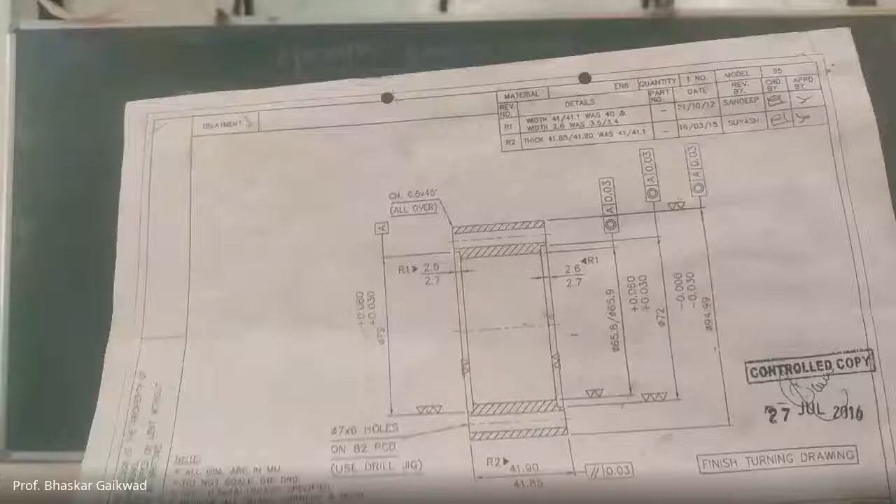The drawing from the industry to manufacture a job. Okay. So we have the drawing and we have the finished job. So this is the finished job. It is visible to all of you, I think. And this is the drawing related to this job. Okay. Now we have to make the process sheet for the same process of manufacturing.

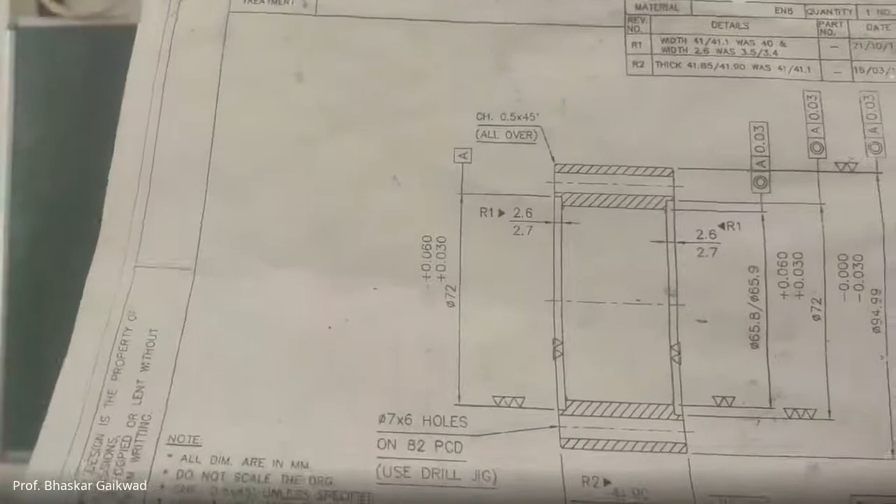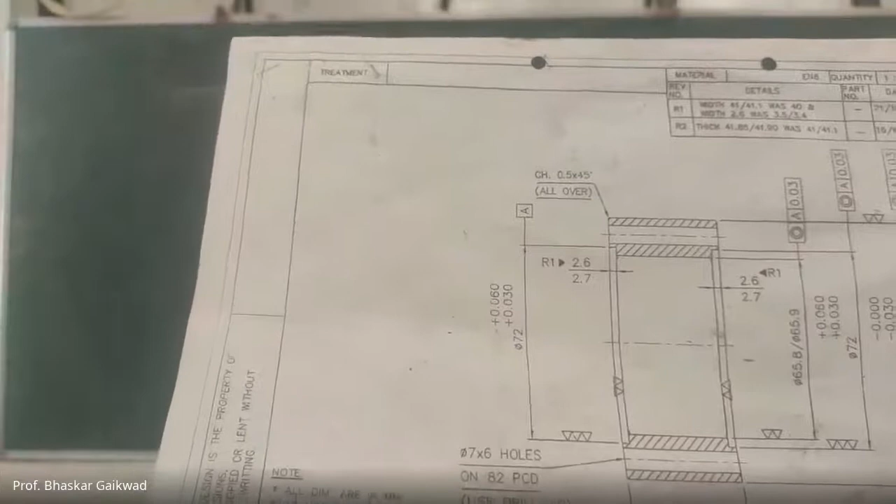So the name of this component is gear blank, which is normally used in our planetary gearbox. And here we are manufacturing the same. So as per the drawing, we have received the material from the industry. So it should be in bar form. A 100 bar is there, and its width is 42, and the bore size is 65, and there is a step on both sides. Six holes are there with PCD 82.

I think you might have seen this type of job in our workshop. And presently, the same lot is being manufactured here itself. So in industry also similar types of jobs are there. So we have to make the process sheet or the process charts. In our industrial engineering, it is called the operation process chart. There are two names of operation process charts: outline process chart and bird's eye view.

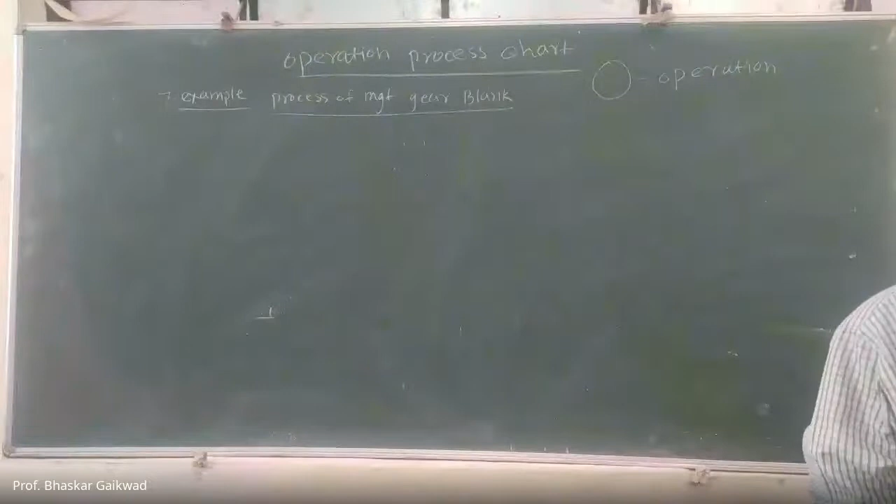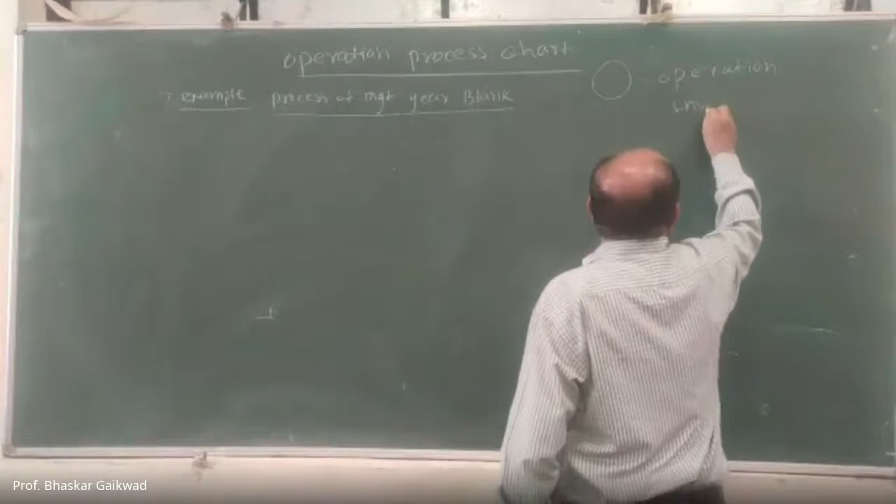Two symbols. One circle is there, so this symbol is the operation. So this is the operation symbol. And the next symbol, that is the inspection symbol. So in this process chart, we can use two types of symbols. So here only operations we have to note down, and the related times required, and the symbols. So we make the chart of the same. So see on the blackboard how I will make the chart.

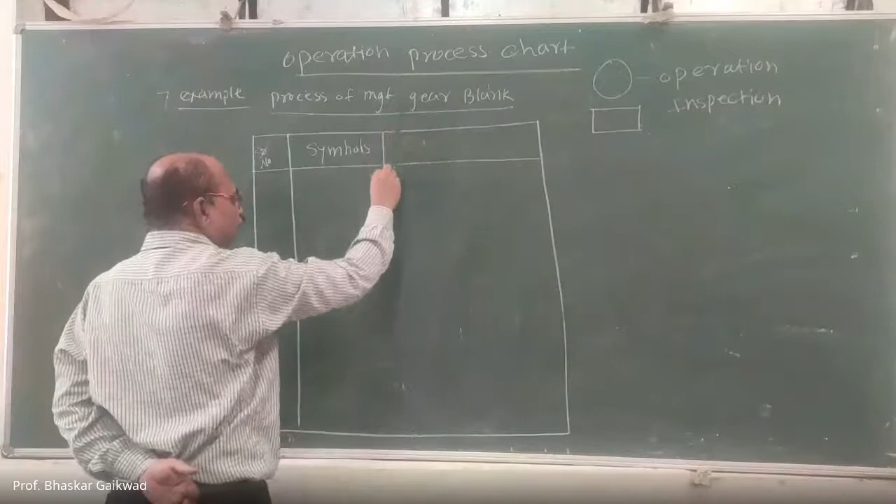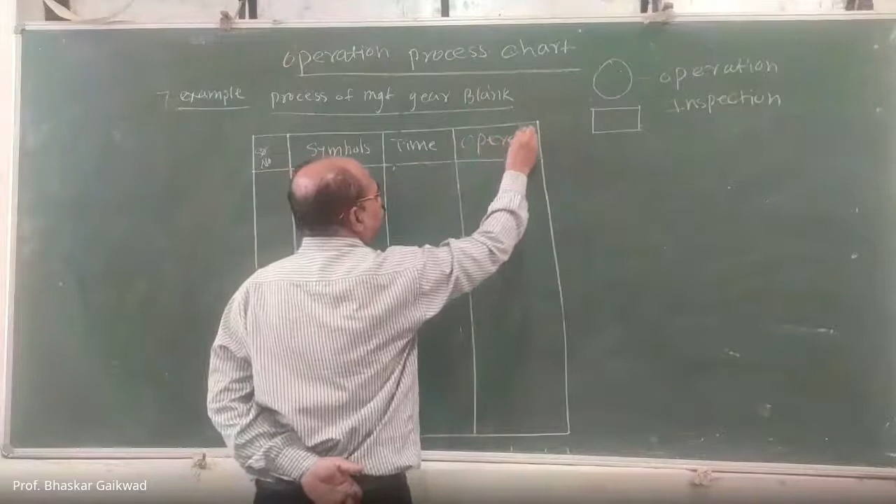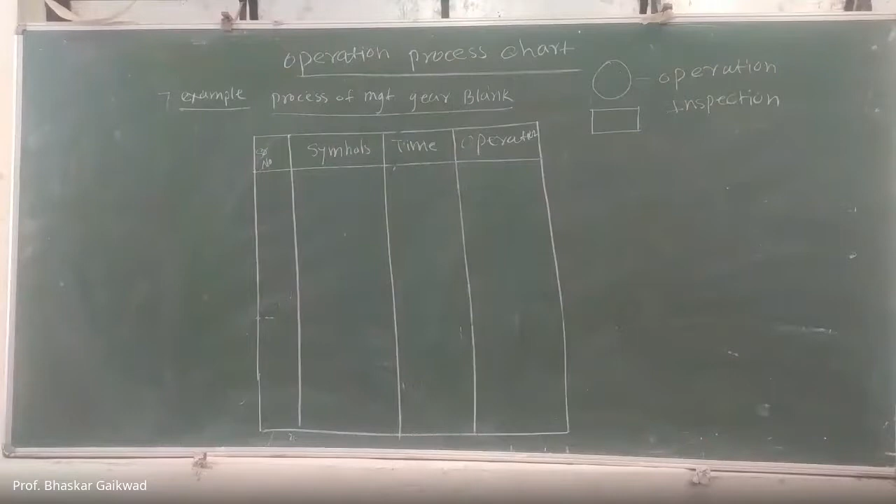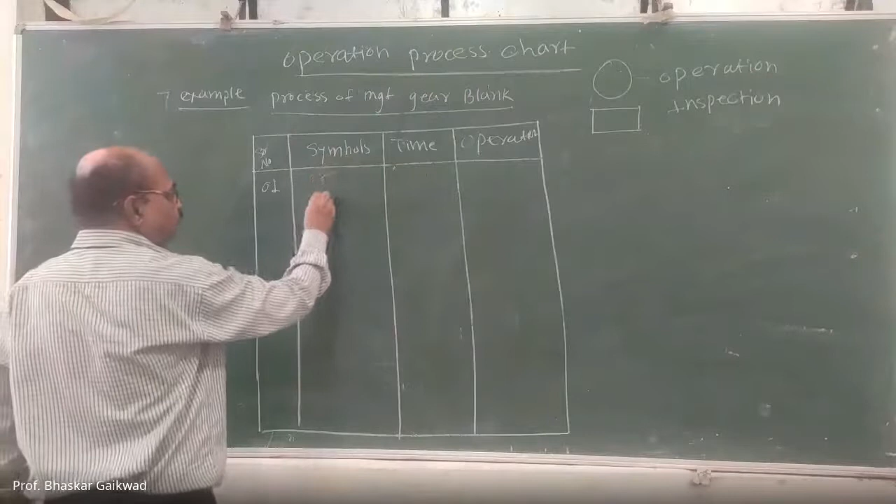So this is the outline process chart, or bird's eye view. So the first operation, once we get the bar from the rolling mills, initially the operation is cutting, to cut the bar into the required size. For example, you can see the drawing. The width of the job is 41.85. So let us cut the job to width. So the first operation is cutting. So cutting is the operation, and how much time is required for this. So this is the first operation.

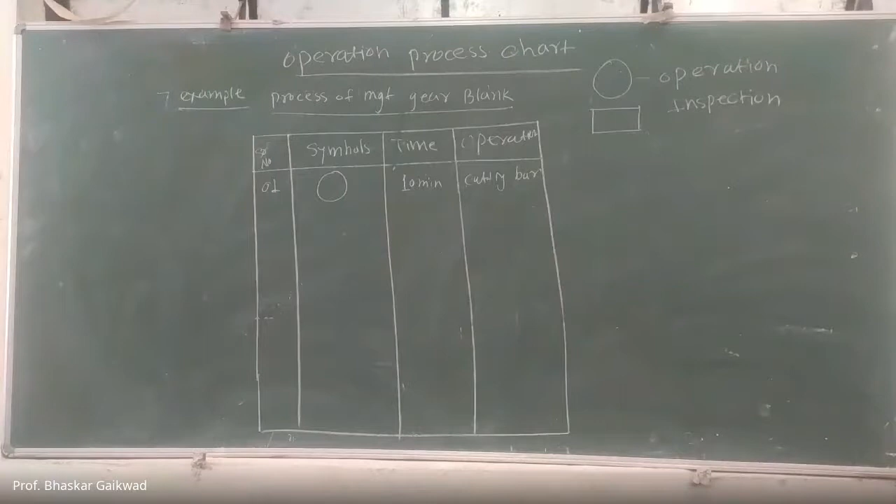After cutting this, what will we do? We'll go to the next operation. What is the next operation? First of all, you will go for the drilling of this hole. So the hole diameter is 65.8. So initially we have to go for drilling and after this boring. So this is one operation.

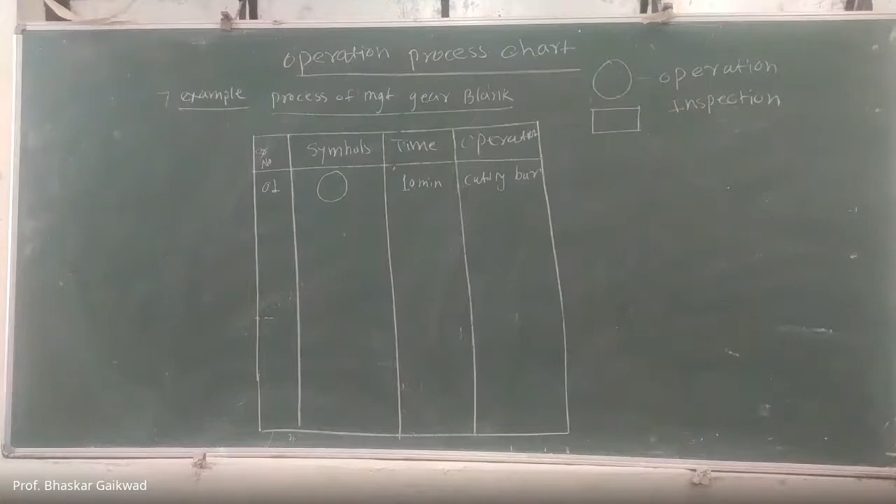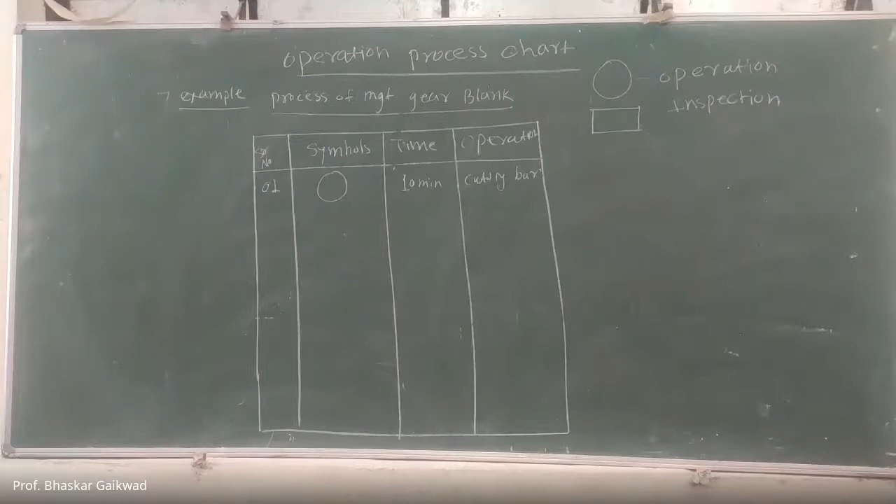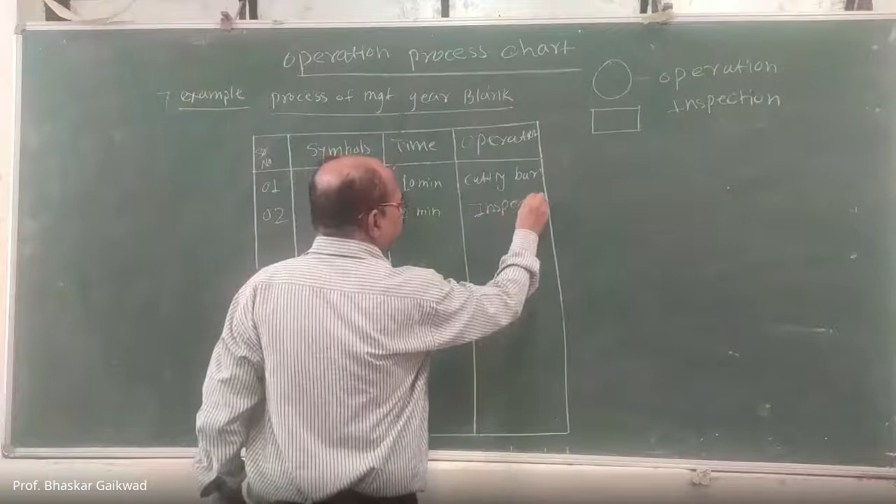Okay. But before that, after cutting, the size of the job we have to check. What is our expected size? 45. So the 45 size you have to check with verniers. This is called inspection. So the next thing is inspection. So here number two, inspection. How much inspection time do we require? At least 2 minutes. And here the operation is inspection. Once the cutting operation is over, then we have to go for drilling. So the next operation is drilling.

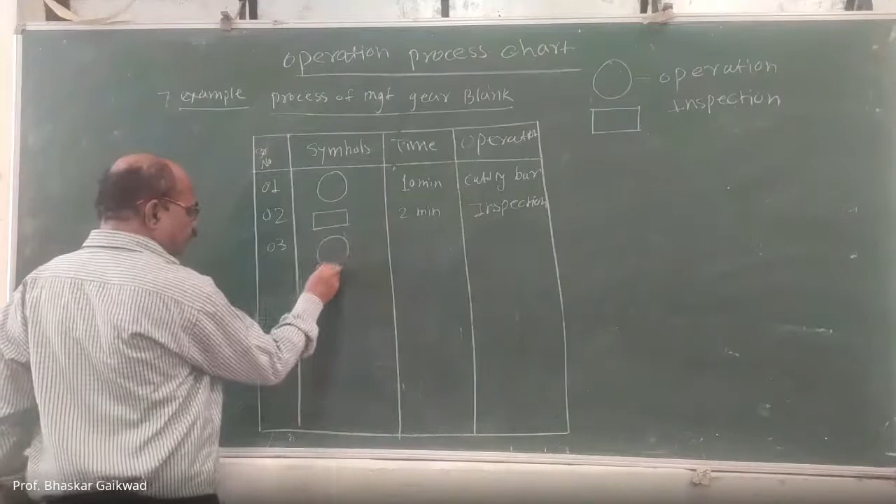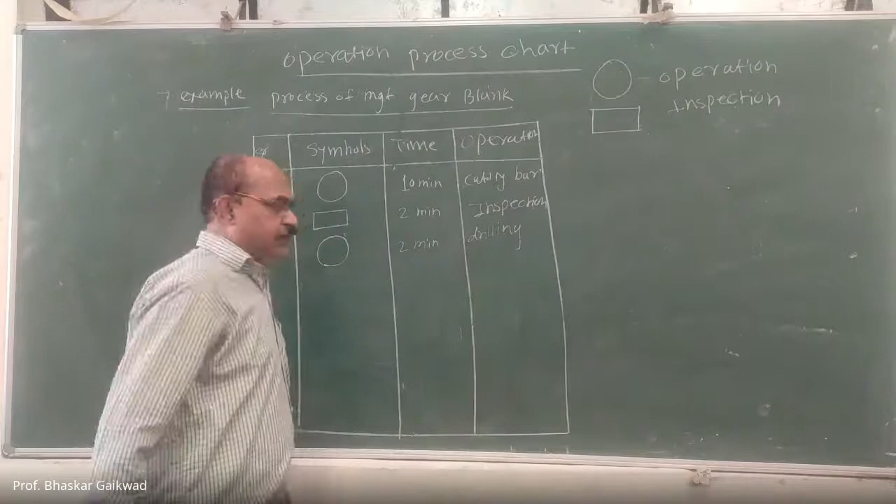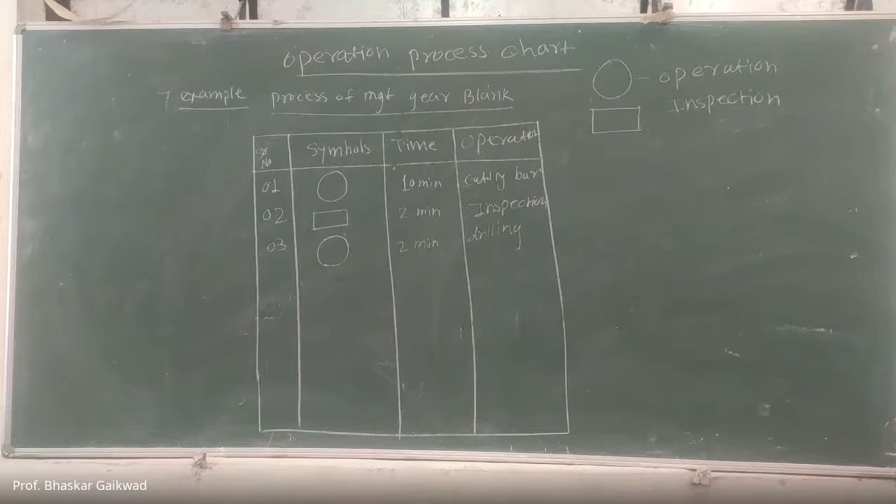Only two symbols you have to use. One is inspection and second is operation. Once the drilling is over, then we have to go for inspection, if you require, but after drilling it is not necessary to go for inspection.

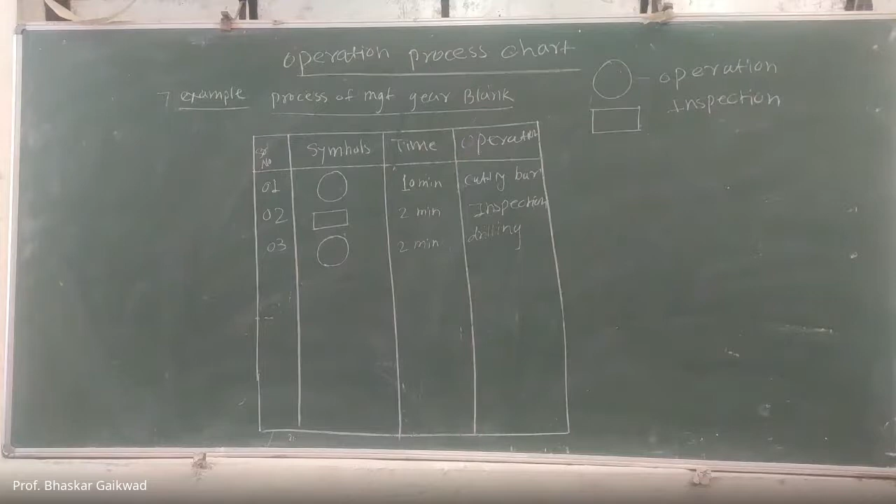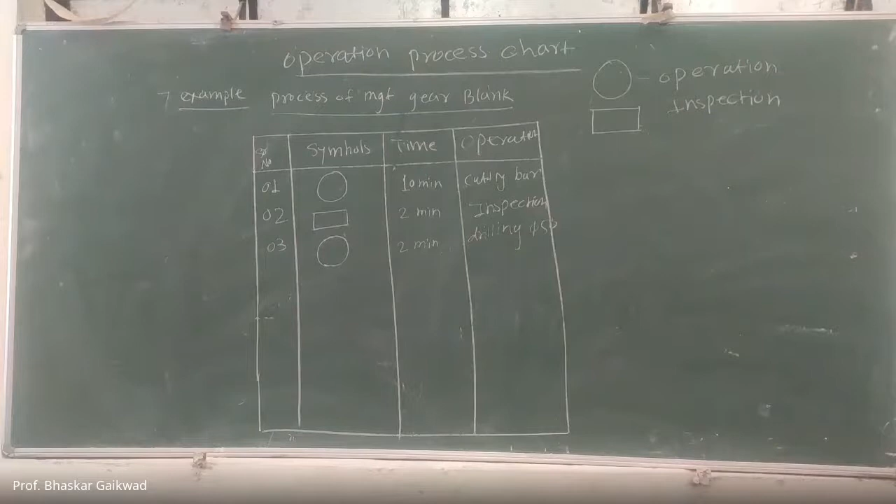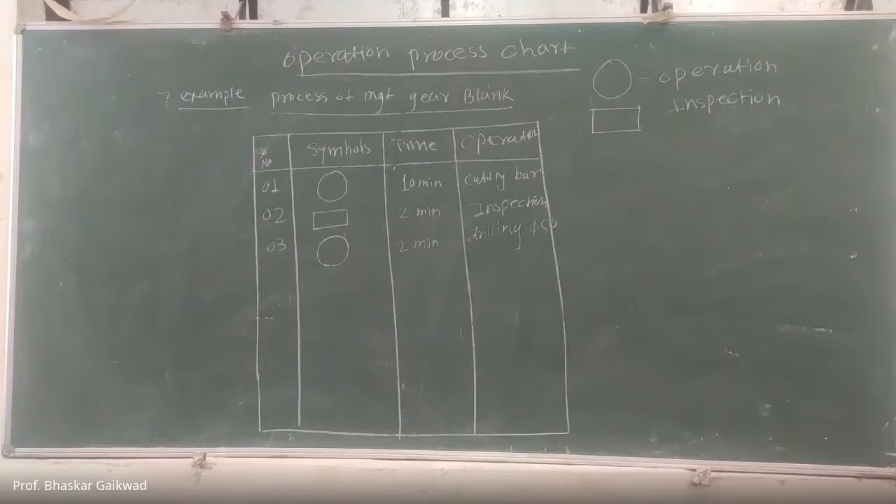Directly you can go for boring, because the bore size is 65, so at least 50 diameter you have to drill. So here the diameter of the drill is 50 mm. A 50 mm operation is there. So this is the next symbol, meaning we have to go for drilling. Okay, so like this, holes we have to go for drilling, and after drilling, we have to go for boring. So the next operation is boring.

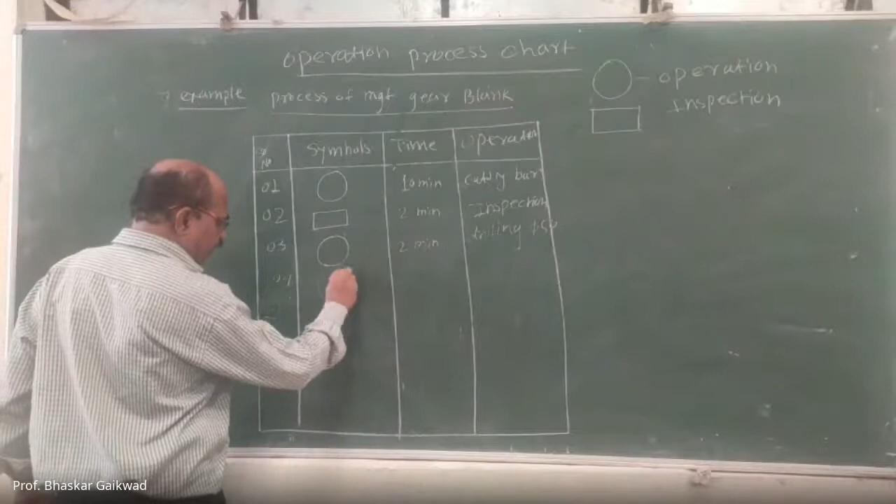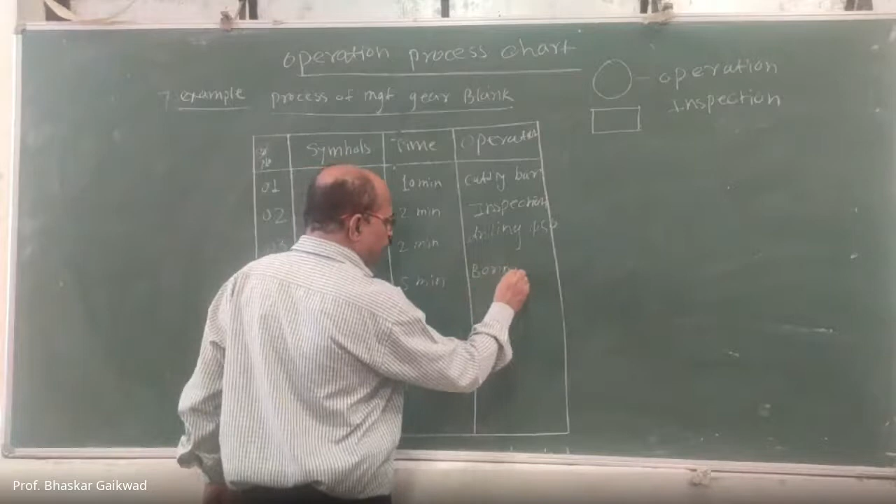Inspection is not required. So boring, on which machine? We have to go for CNC machines. So here number four. Once again an operation is done. So for this operation, let us consider 5 minutes, and the boring operation is done. So at the same time you can go for the boring, step turning, and facing operations. Within the same setup, you can go for boring and step turning.

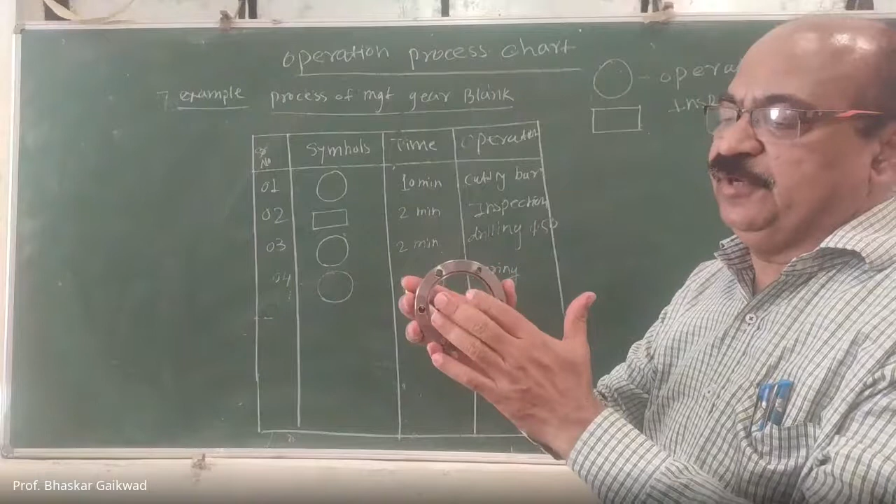Step turning means what? Whatever step is there. See this. This is the step. So you can see that this step is there. So you can go for the facing operation, the boring operation, and this step. So here, the facing operation is there, and the step turning.

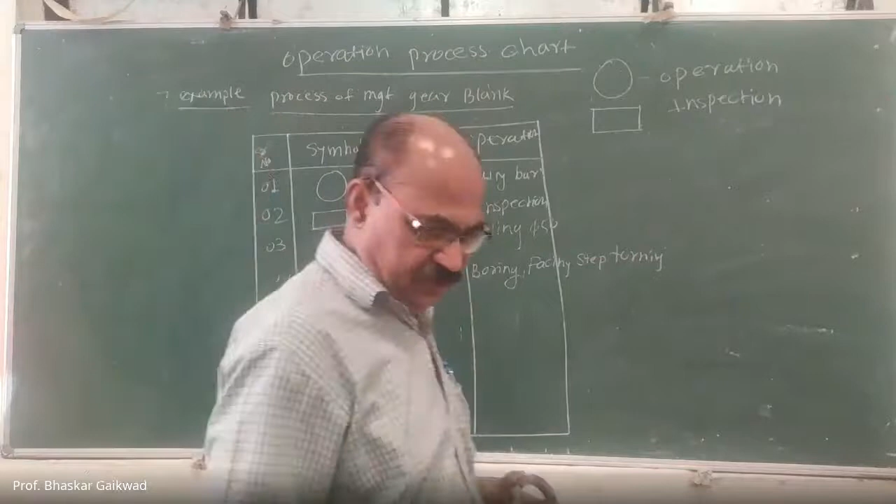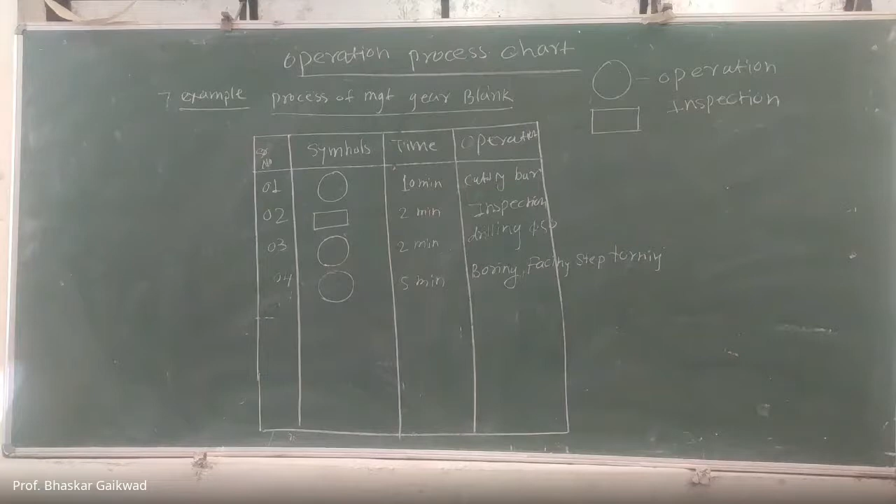So here, facing operation, and here step turning and this boring operation. So three operations at a time we can do with the help of our CNC machines. So this is the next operation. After this, we have to remove these jobs and get them checked. The next thing is inspection.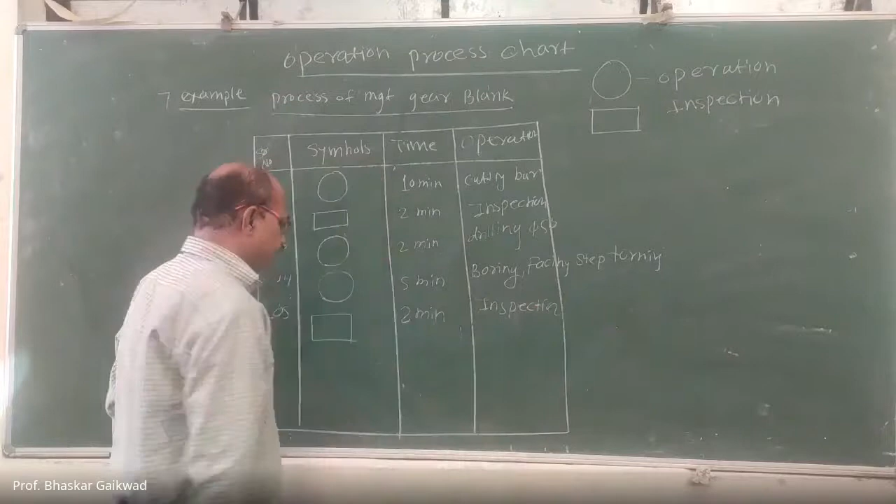So here, after all these operations, you have to go for inspection. 2 minutes inspection is required. So here, inspection. This involves input inspection. Try to remember this thing because it is expected to be asked in your exam.

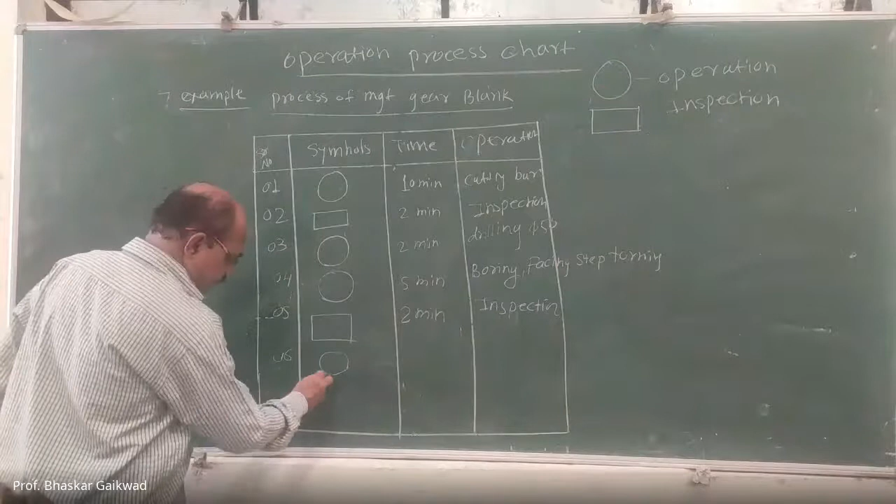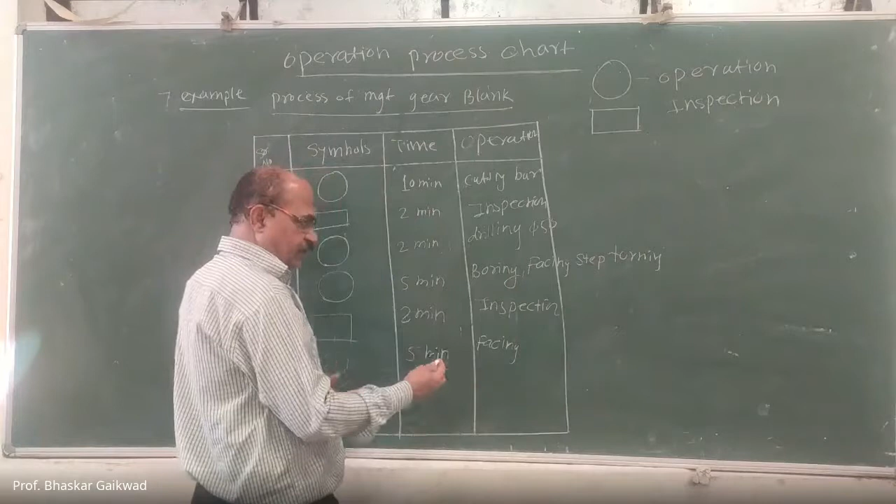So after inspection, you have to go for the OD turning, step turning, facing for the next side. Okay. So next operation. So here we require something like 5 minutes. So here facing operation, just like turning, OD, and face.

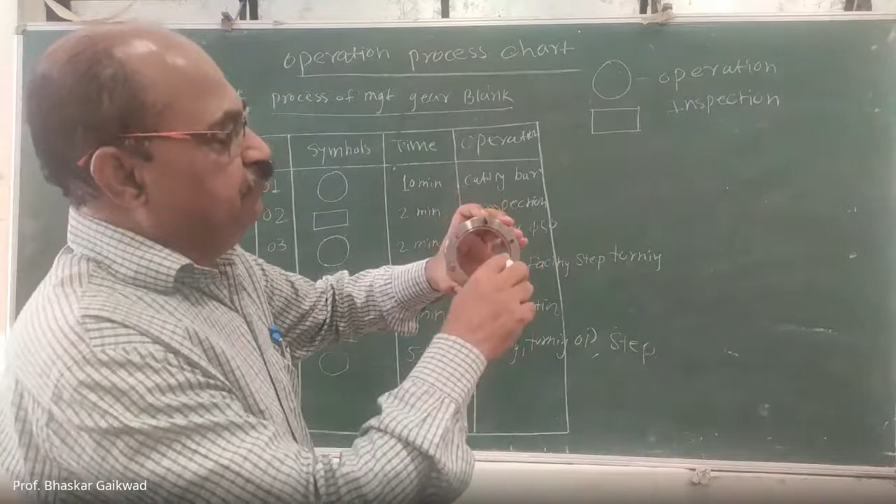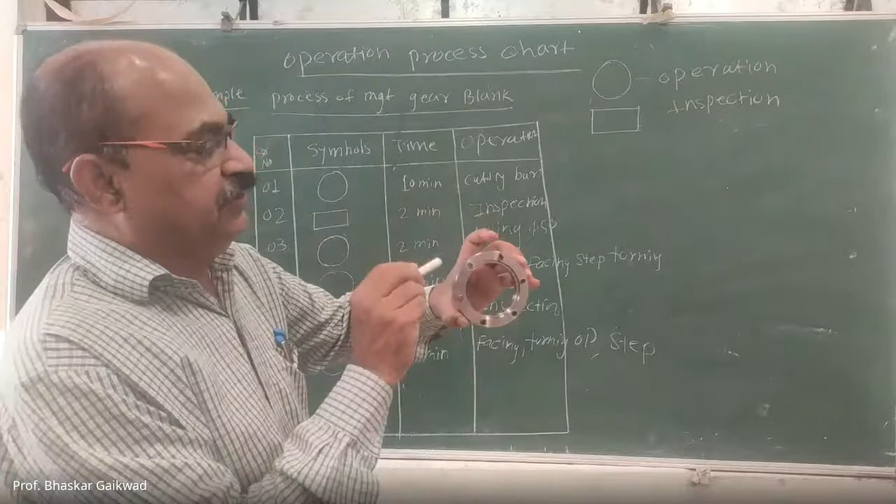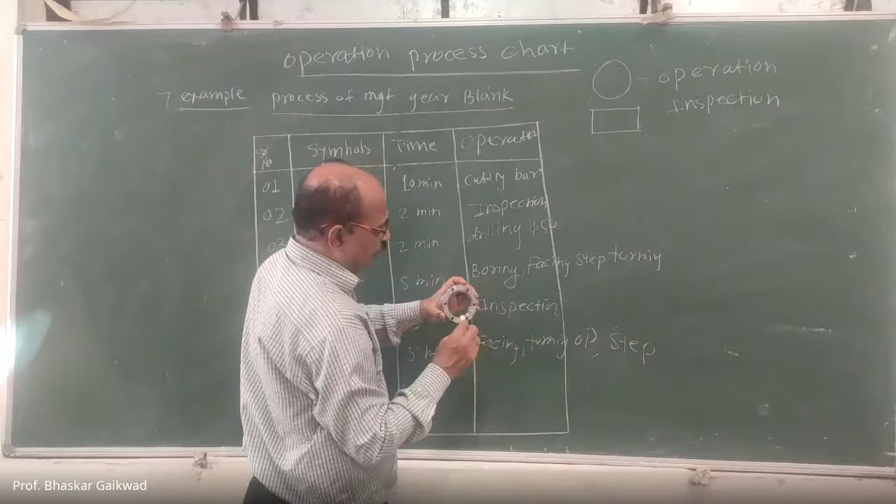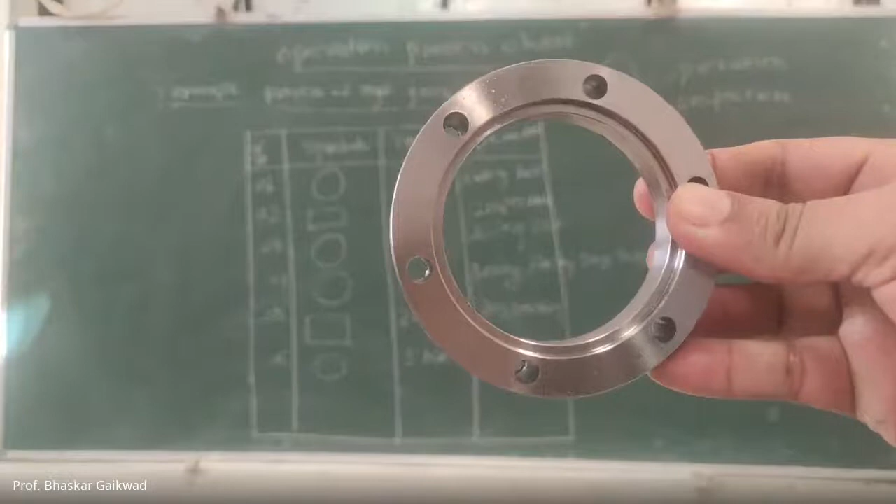Then after this, we have to go for drilling. So here you can see the drawing. So drilled holes are there, having 82 PCD, pitch circle diameter. Means our three jobs we have to get drilled on these holes. Six holes are there. We have to get them drilled on VMC machines. But before that, after six operations, we need to go for inspection.

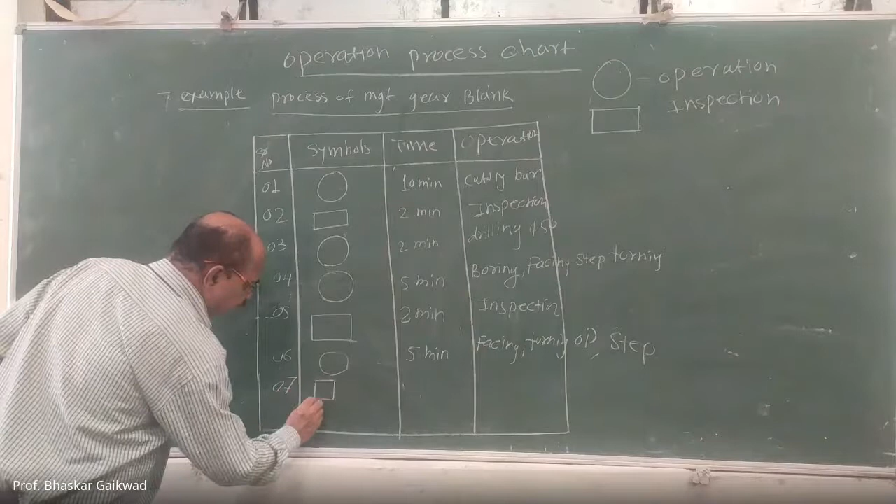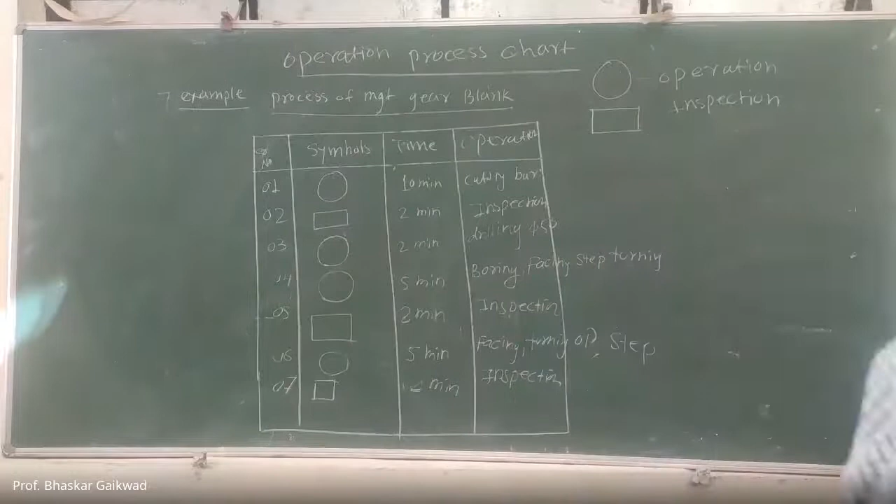So you can write your inspection. So again, it is inspection. 2 minutes, let us consider, 2 minutes inspection. And after this, we have to go for drilling operation and inspection operation. So operation number eight, drilling. So these holes we have to go for drilling operations.

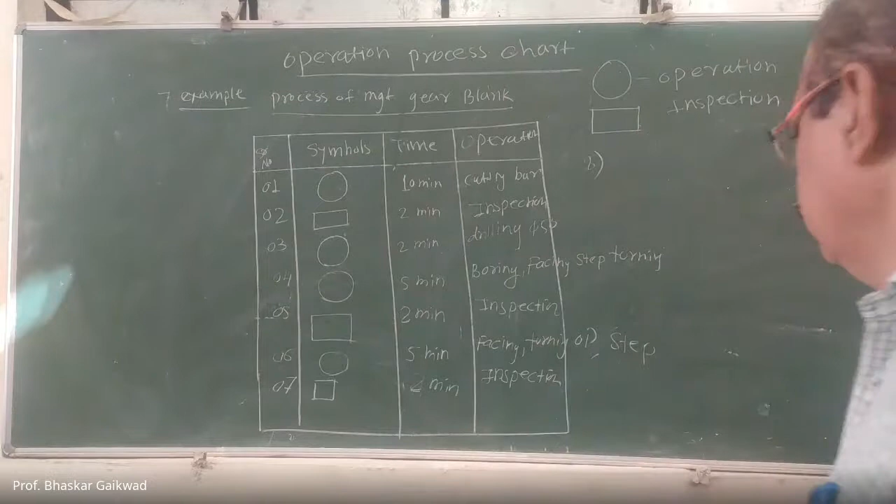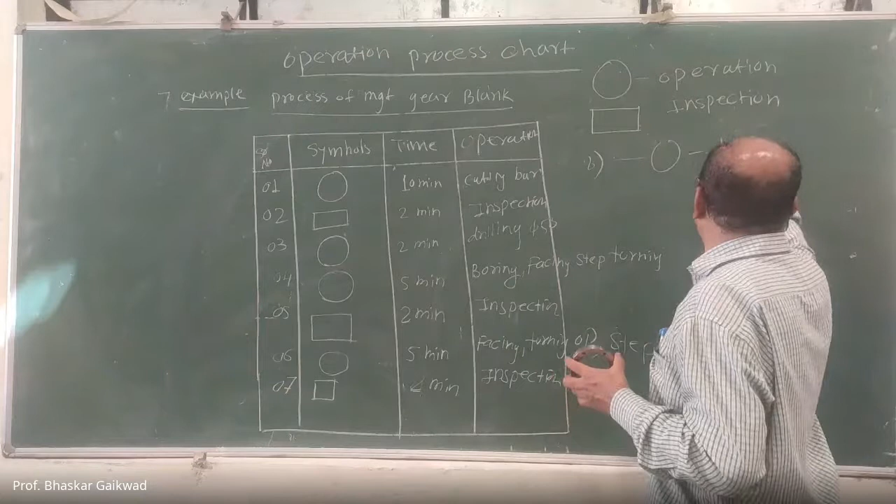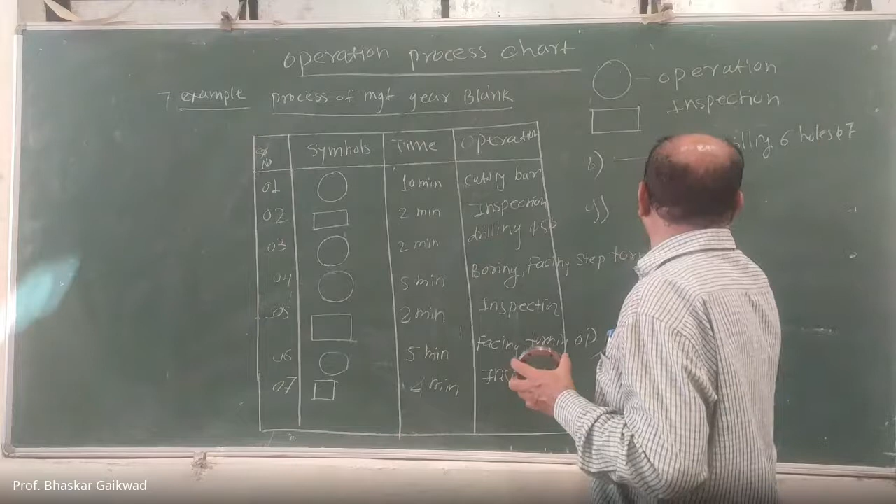So here serial number eight, eight is the circle symbol, this is the drilling operation. Drilling six holes of diameter 7. Okay. And after this, you have to go for inspection. So what is this operation? Here we require the time for this is 20 minutes and 2 minutes for inspection. 20 and 2 minutes for drilling these holes.

Correct. So these are the operations for gear blank manufacturing. These jobs we can do in our workshop only. But once these jobs go to industry, the next operation is the broaching operation, because here we require internal gears. Internal gears in mass production are manufactured by broaching. Okay. Now in this, how many numbers are there? Nine numbers. So within nine numbers, a few operations are there and a few inspections. So you can count all these things. So in the left side, I will write total.

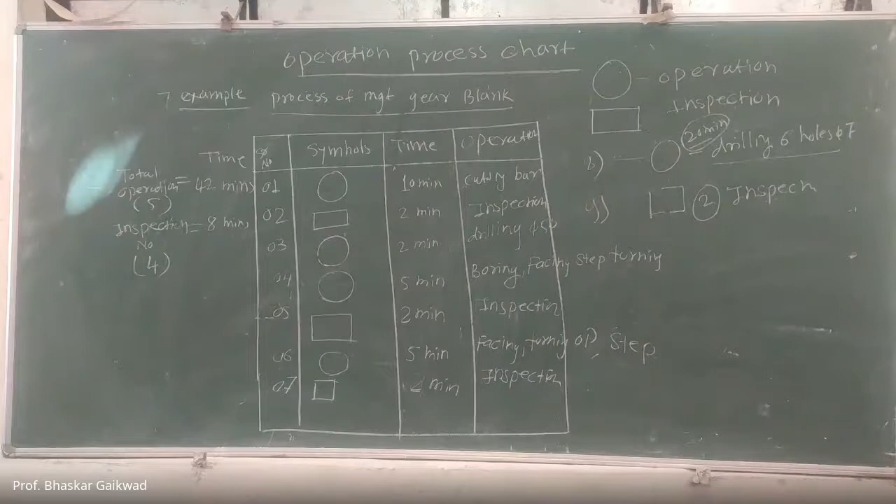Now why are we going to study like this way? Because in every industry, as per the standards, we need to calculate the time required to complete a job. Otherwise anybody will take any amount of time to do anything. Somebody will take more time, somebody will take less time, and more time is not affordable to that industry. Less time is also not affordable because there is an effect on the cost and an effect on delivery date.

So in order to avoid this type of bottleneck in industry, we actually need this type of chart, and through the charts we have to decide the standard times in our work measurement. How to decide the standard times for particular jobs is given, so numerical problems are there that we're going to solve in chapter 4, work measurement. So the actual time for operations and actual time for inspection, we have to work out in work measurement. But before this, in industry, you have to prepare the process charts as per the operation and inspection.

So this process chart is nothing but a graphical representation of two types of activity, only operation and inspection. Try to remember, here we are only using two symbols: one is circles which represent operations, then rectangles which represent inspection. Only two symbols we have to use.

This is also called outline operation process charts, also called bird's eye view. Means only outline things you have to see—operation and inspection, nothing else. So this is called the process chart. Anybody having any doubt related to this operation process chart?

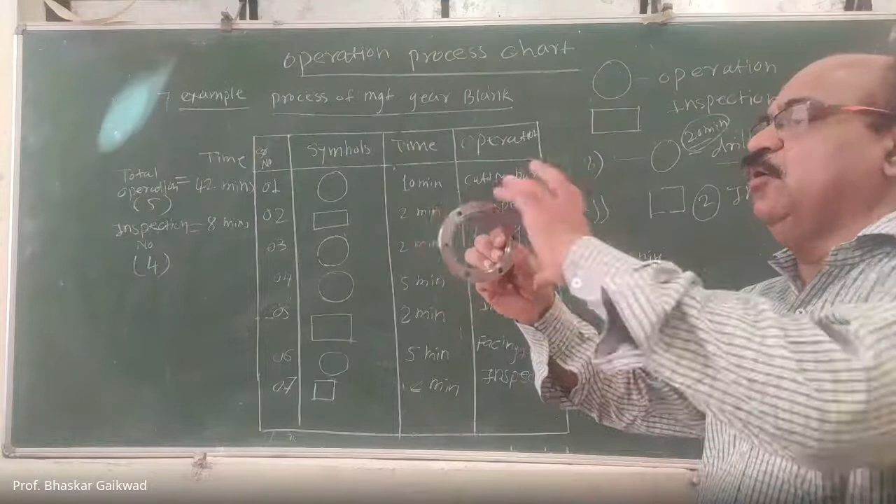Here you only have to remember two symbols, operation and inspection. You can count the number of operations and related times, and count the number of inspections and their times. This data is actually required in our work measurement to calculate the standard times required to manufacture a job. So here, how much time is required for this job? That will be here.

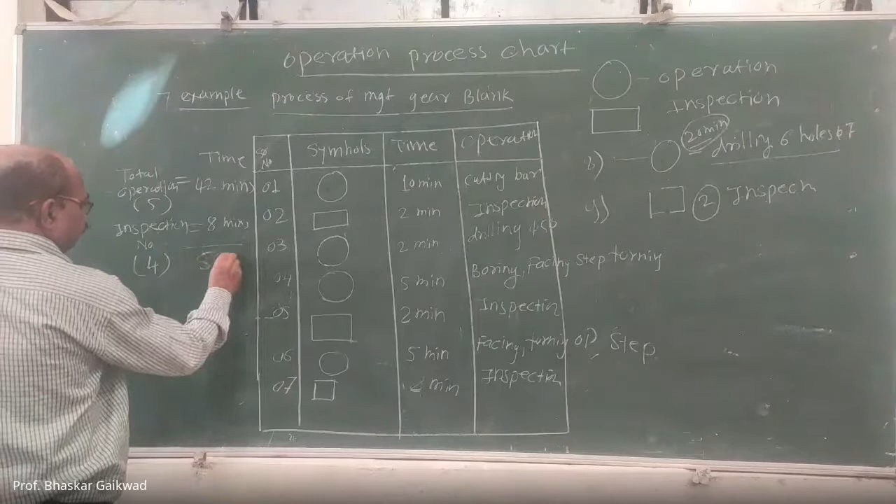So these jobs we have to manufacture within 50 minutes in our workshop. Now you have to make the work study on this, whether this is affordable to our workshop or not, and what should be the standard times for manufacturing the same. You have to study this. This is a part of our method study.

If there are problems, then you can change the present process—this is called method study. So here the method of manufacturing is like this: cutting bar, inspection, drilling, boring, facing, etc. This is the method of manufacturing. Now, by using these methods, we required 50 minutes time.

Now what is your main motto? To justify these 50 minutes—is it okay for these jobs, or are you going to reduce this? If you succeed in reducing the manufacturing time, definitely it is beneficial to our workshop. This is actually required in industry to reduce downtimes, reduce unnecessary operations, and improve the present method of manufacturing.

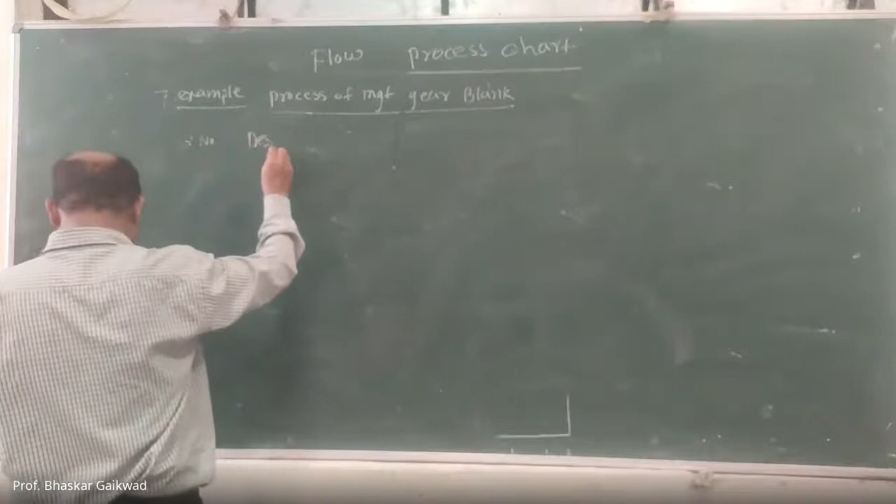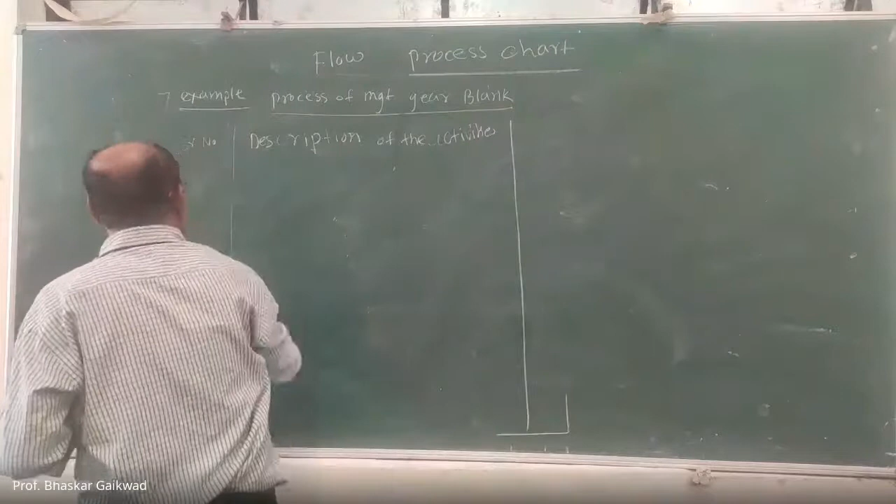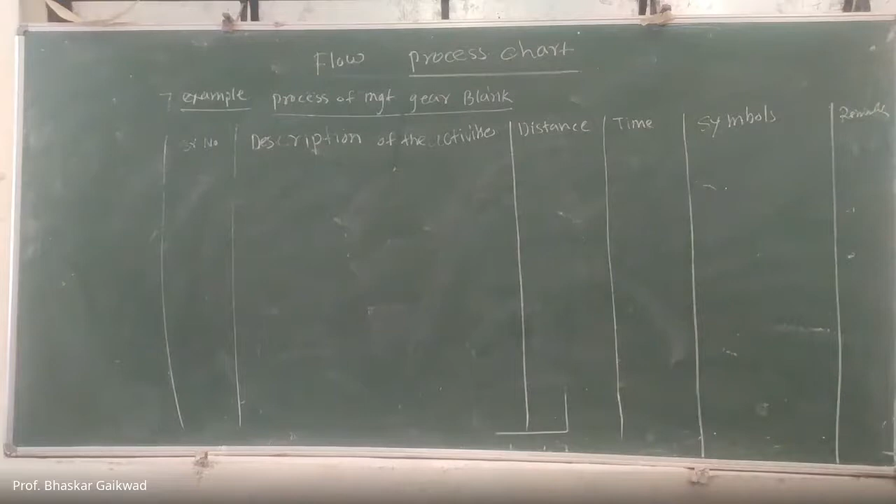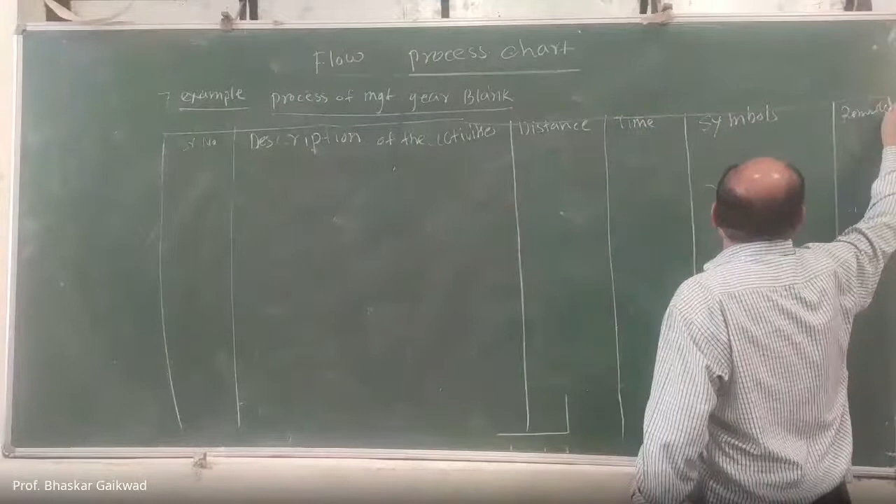So this is distance, time, symbols, and here remark. Okay, so we will make the flow process chart for this. This is the required format.

Suppose we have the raw materials at the corner of our workshop, and there is a bandsaw machine. First of all, we have to bring the bars from outside - meaning transportation is there, to bring the bars from outside. This is the first thing, so I will write the first thing.

Outside, maybe an industrial area, MIDC, rolling mills, like this. So how much distance is there? Suppose we are purchasing this bar from Solapur MIDC - around 75 kilometers distance. So you can write that distance, 75 kilometers. So how much time is required to bring this bar from Solapur to Pandharpur? 1.5 hours - you can write 1.5 hours.

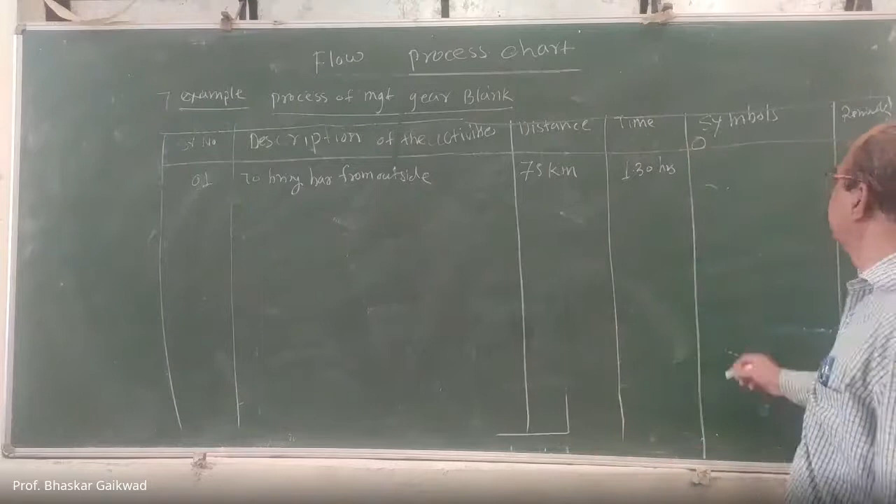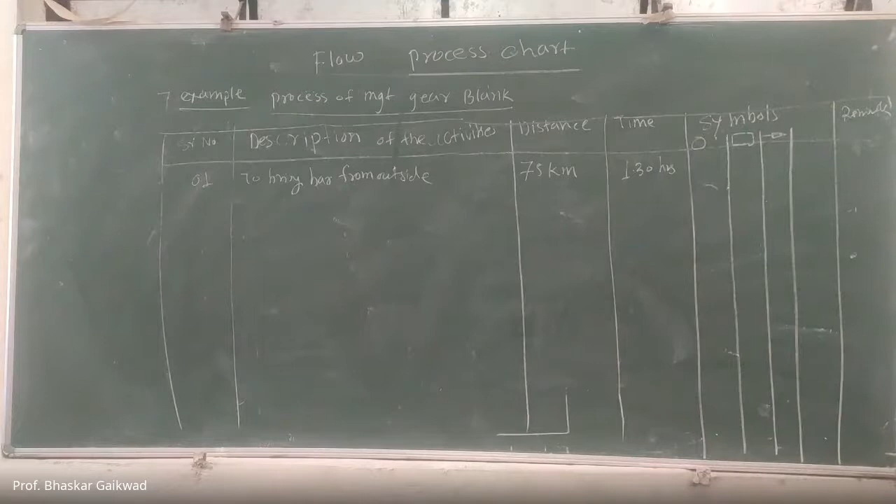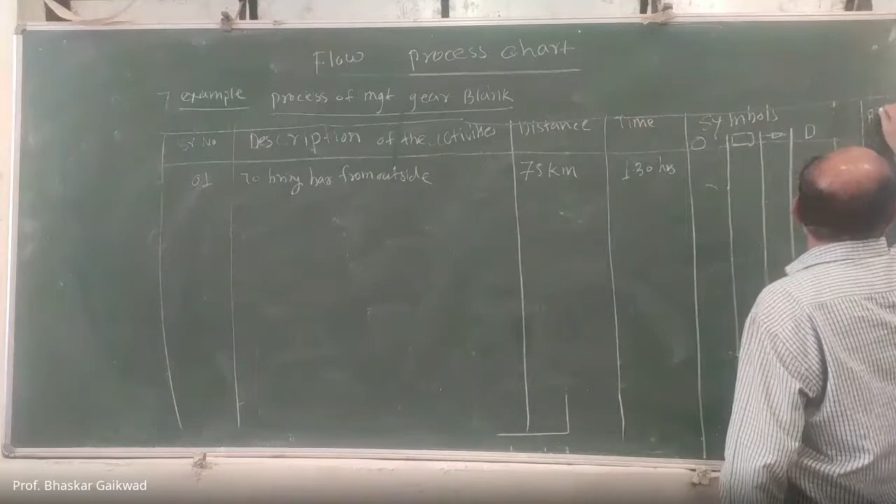Which symbol can we use here? We require all types of five symbols. So here's the first symbol - this is operation. Then the next symbol - this is inspection, shown rectangular. Then next, the arrow shows transportation. So you can put the symbols for operations, inspections, transportation, delay, and store. Here delay D, and here store.

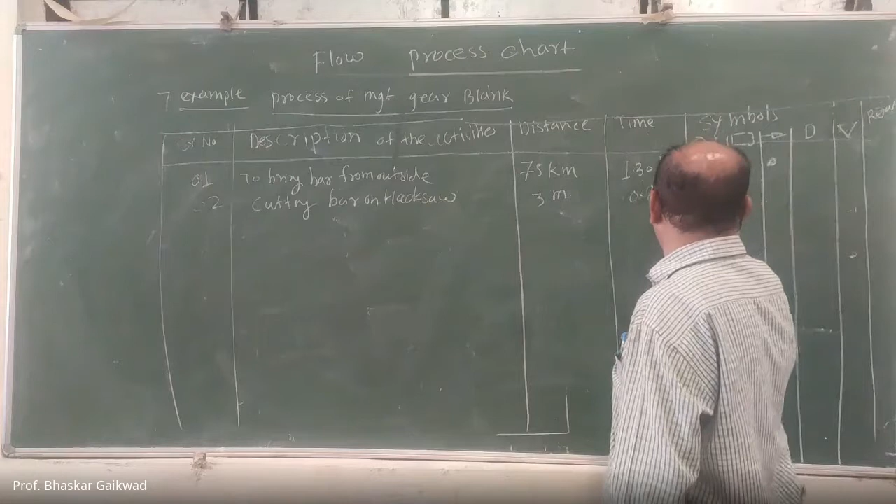So for this, how much distance? At least 2-3 meters. Because we always keep track of how much time is required for cutting, that is 0.20 hours. And this is the operation you can make. So if there are operations in the operation column, you can make the dot.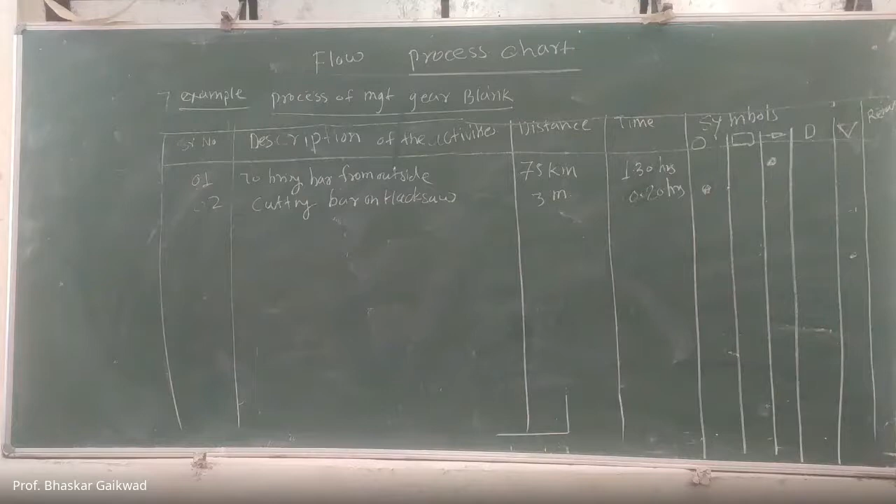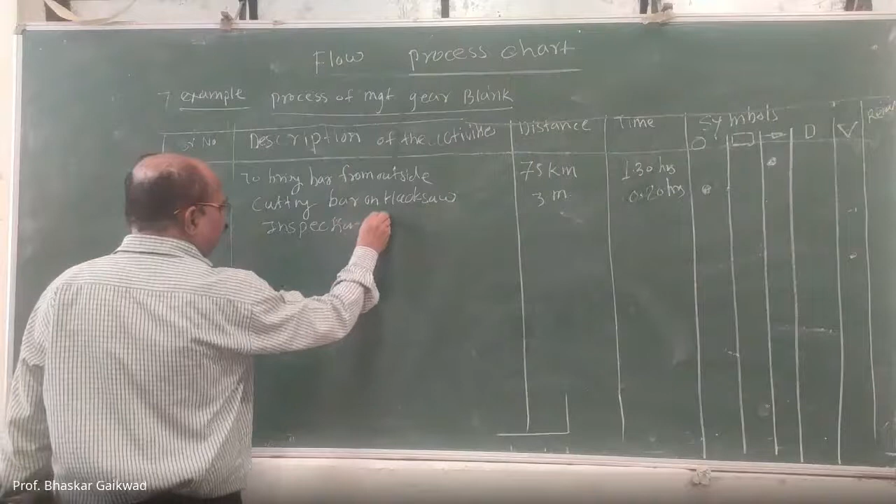After this, is it necessary to go for inspection? Yes, so next the inspection part is there. Inspection of bar, how much distance is required, not distance required. And here again, 0.01 hours we consider. And the corresponding symbol is here.

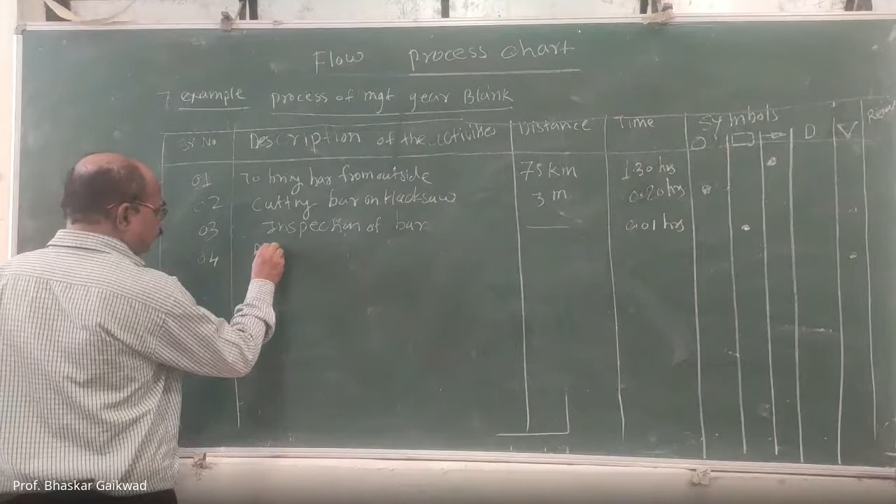So this inspection is what, after this, after cutting, we can bring this material to the drilling machine where drilling is going on. So here transportation is there to bring to the drilling machine.

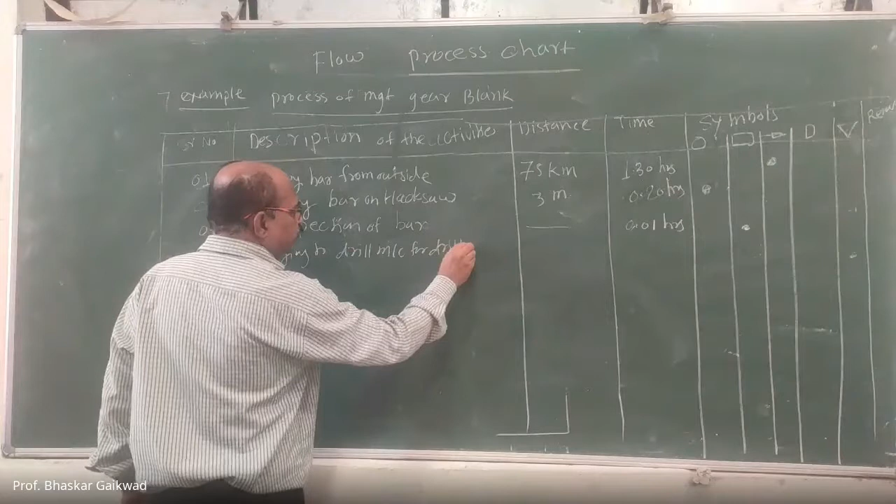So here again 5 meters we consider, and how much time we consider. So here the transportation.

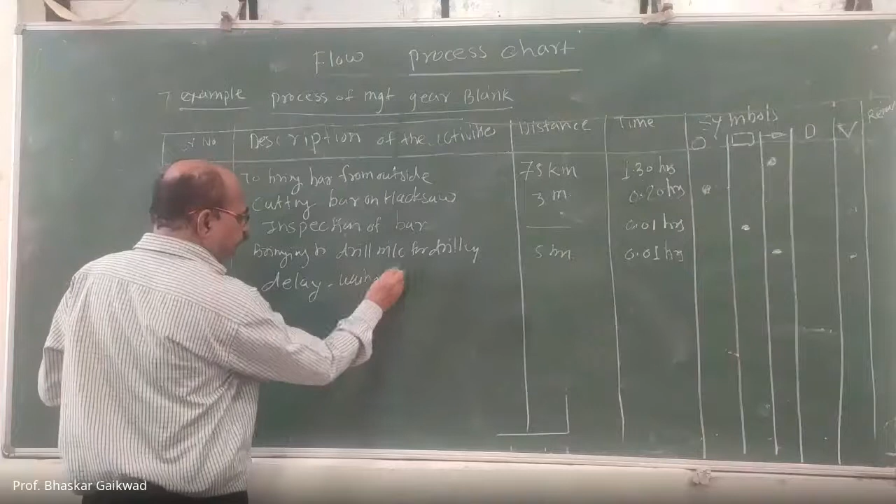So once it will come to the drilling machine, and previously a job is going on the drilling machine, then that part will stop for a few minutes. So if the present job is going on, then there is a delay. So next operation is the delay, waiting for the first job. So there's no distance between that.

So after this delay, once that delay period gets over, then it will go for drilling. So next operation is the drilling. Drilling operation, no distance required. Drilling operation point, again this is the operation.

After drilling, we can bring these jobs to the CNC. Some distance traveled, bring to the CNC machine.

After that, CNC operations and VMC operations. After this, we can make CNC operations and VMC operations. The next, number eight operations are CNC. So there are distances required, and the operation amount required. And after this, an inspection is there.

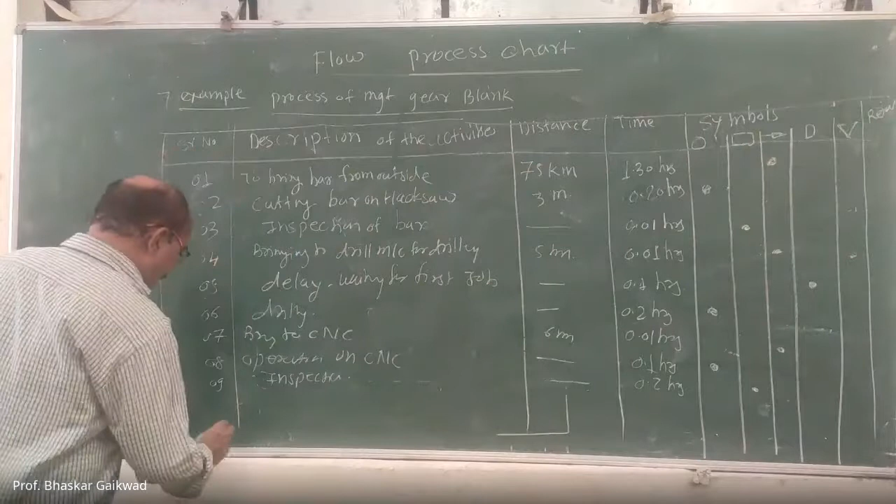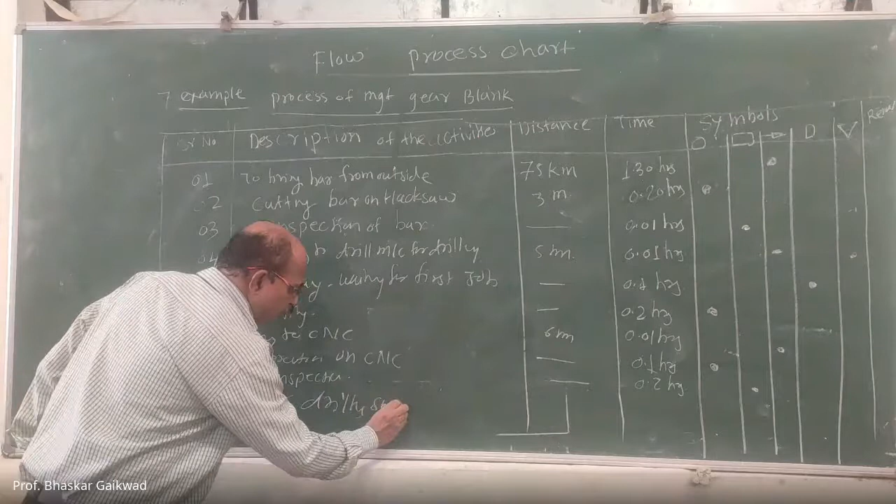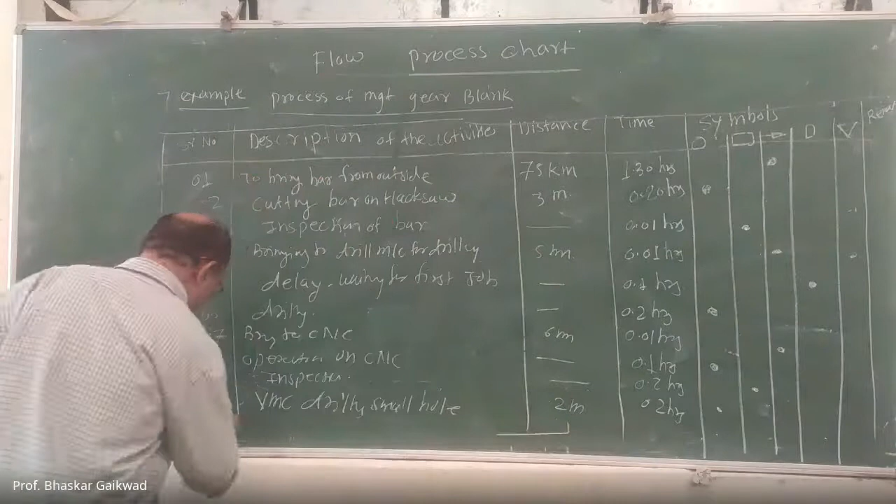And VMC operation, what is the VMC? Then transportation, here we can take estimated transportation, within operation, operation. And after this, we have to go for inspection. Inspection, nothing in that, here inspection point 1 hour. And here inspection.

And the last one is the store, we can store it. 12 operations, that is stores. You can join all this.

Correct, so after joining, you will come to know what is the actual flow of this material. From the sources, meaning where we are purchasing the raw material, to the stock in our workshop. You can try to understand, just 2 minutes, and if anybody has any questions, you can ask.